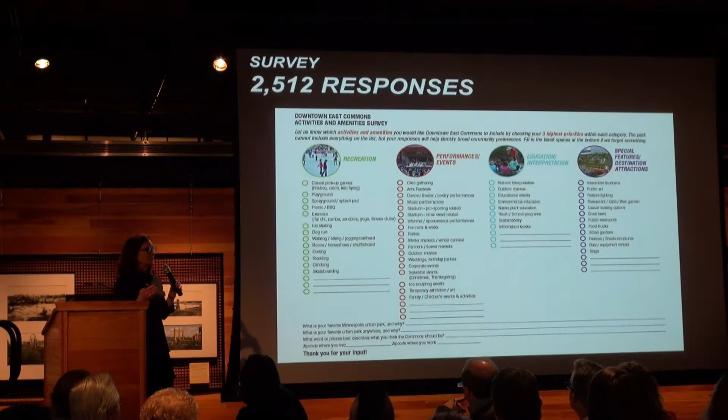So, public engagement - this is the Survey Monkey. You've all seen it. We asked you to give us your top 3 in each of these categories, from recreation to performance and events, to education and interpretation, to special features.

Not only are we pleased with the number of responses, it's pretty interesting to see where people live. Vast majority live within 5 miles of the Commons, or work within 5 miles of the Commons. That's pretty interesting. And these are the top 4.

We went ahead and charted the top 4 in each of those categories, because after the top 4, it drops off and they all become more equal. But it's sort of interesting to see the top 4.

So in recreation: walking, jogging, trails, picnic, barbecue, casual games, ice skating. That was sort of interesting.

In performances and events: music, farmers markets, flower markets, outdoor movies, art festivals. In education and interpretation: outdoor classes, sustainability, and environmental education, and then historic interpretation. So that was pretty interesting to see.

And then special features: urban gardens, restaurant, cafe, beer garden, great lawn, and public art. So what we like about these responses is that they're very civic-minded. They're very big ideas.

We also asked you to tell us about your favorite urban park in Minneapolis. And the interesting thing is there's not really a true urban park on that list, and that's because there's really not one in Minneapolis. So we learned something from this list, and then your favorite urban park anywhere - certainly those are great examples.

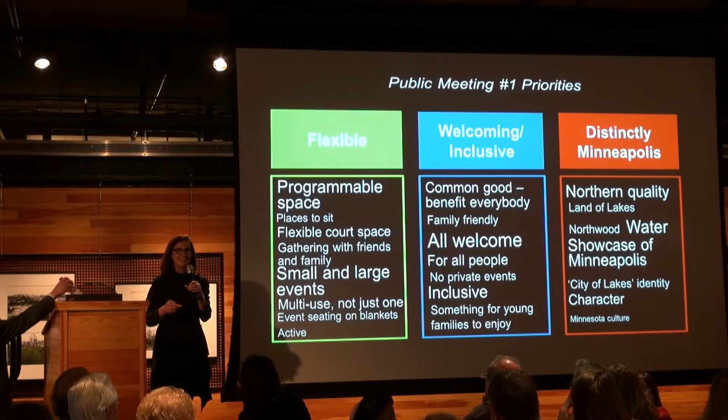So again, really great feedback. I seem to remember that sitting on blankets was 'anything you can do on a blanket' - that's what one table wanted.

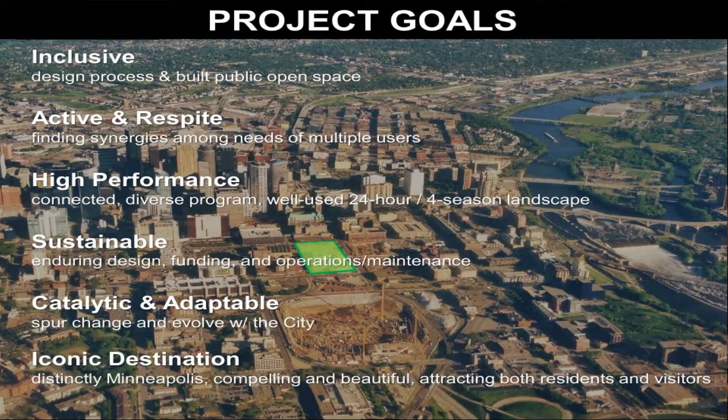So we want this to be inclusive, open to all, active and respite - Councilman Frey talked about that. High performance has to work well. Sustainability has all kinds of aspects to it, from social sustainability to environmental sustainability. It needs to be a catalyst for change and adaptable to change. And it, most of all, needs to be beautiful, an iconic destination, and it needs to be of this place.

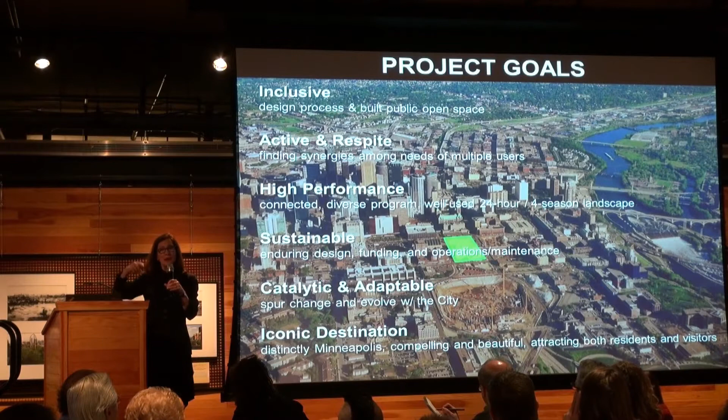So we'll talk about the alternative approaches. And again, Peter said it, but I want to say it again: we're not looking for a vote. Of course, if you like one, say so. But what we're mostly looking for is what you like about each of the four.

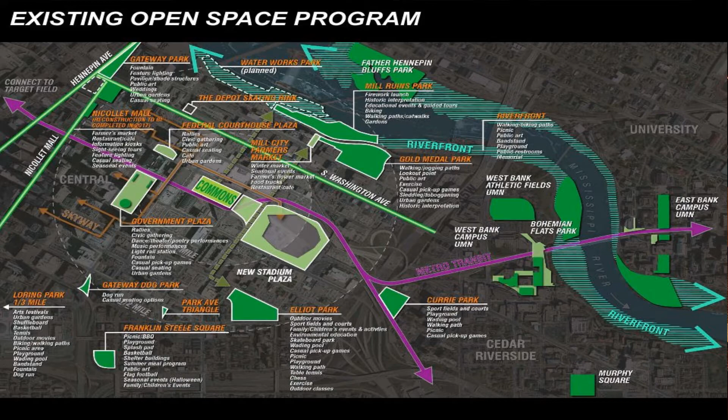Because we purposely chose alternative approaches in order to elicit response, we did it thinking about the context of the parks and public realm that surround us. Remembering that we have other features around us, we don't need to necessarily duplicate. We can't do everything on this 4.2 acres. Some things are being done other places, so how can we complement, how can we contrast, how can we add to?

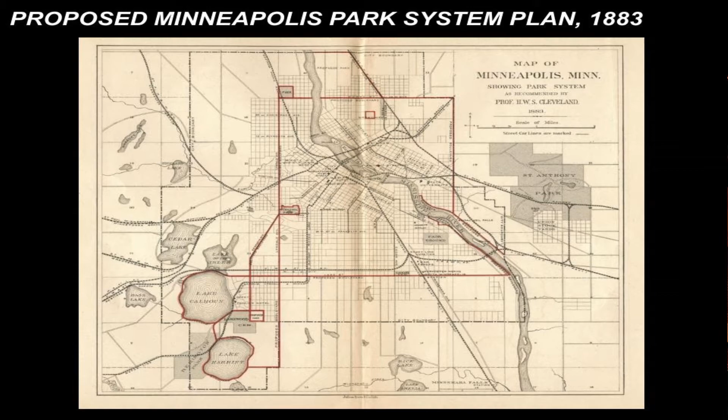We look to history on this site. There's a great amount of history on this site, but there's also a great history of park planning in Minneapolis. So we look at the proposed plan from 1883 by Cleveland, and it's pretty amazing to think about ourselves within that context. We also think about the environmental conditions of the site and the fact of Minneapolis.

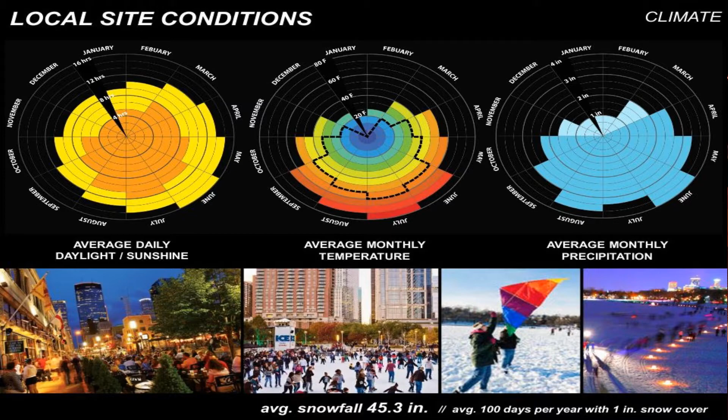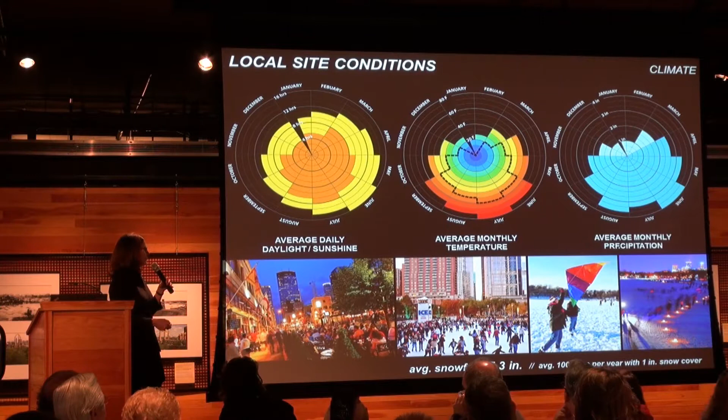Now this is one of the things I always find interesting. You have a lot of sun. I lived in San Francisco in my lifetime, and San Francisco doesn't have as much sun as you have. But alternatively, you have some pretty cold temperatures and warm temperatures as well. You have a fairly typical precipitation model, but you also have snow. So these are things that cause us to think about what to do, how to do it throughout the year.

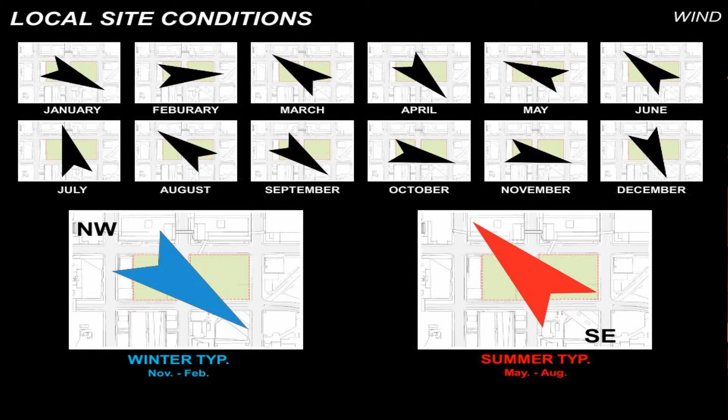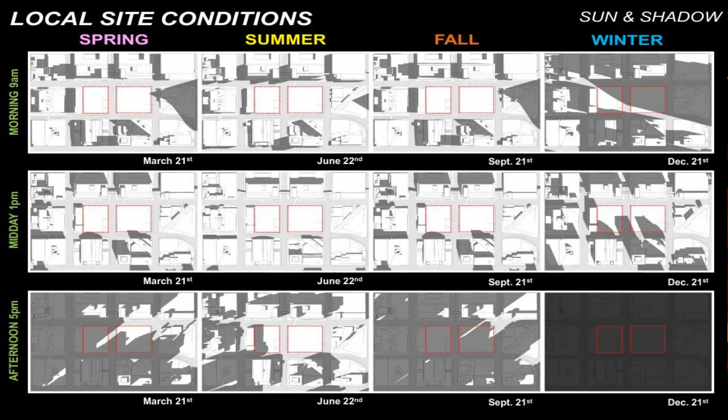You've got some pretty significant northwest winds that come across the site that we want to block to the best that we can, but you've got some nice southeast breezes that we might want to capture to the extent that we can. You've got a nice sunny site, partly because of the nature of the streets that surround it and the nature of the buildings to the south, which tend to be lower. The Armory will be there and it's lower, and then the County Services Building has a low portion. So the site gets a lot of sun, good sun, which is great.

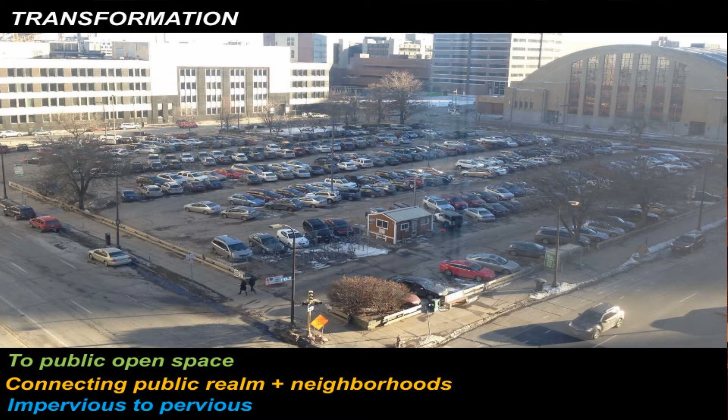Now we think about sustainability, and we think about the way one measures environmental sustainability and environmental change. We think about what the site is now - it's mostly impervious. We will be transforming that to mostly pervious. We will be making connections, and we will be making public realm and open space.

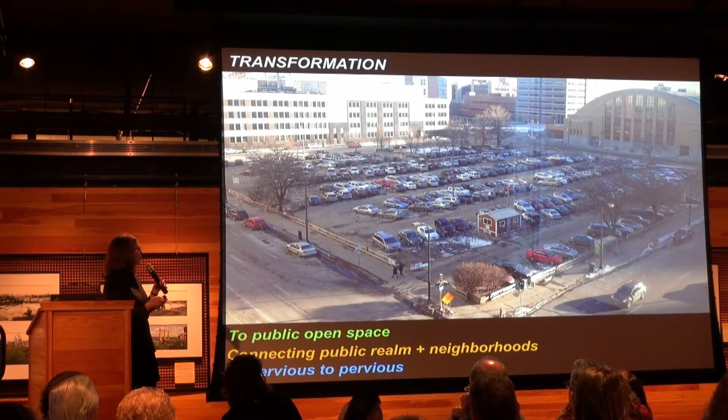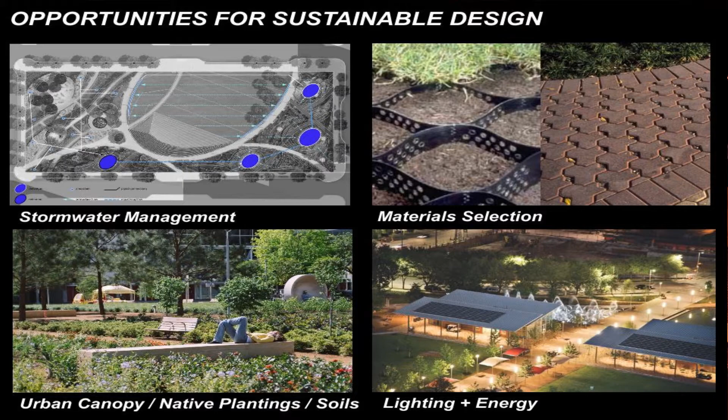We can treat stormwater like we did in this park that we did in Portland. We can choose materials that are permeable and robust. We can use plantings that are native, and these are solar panels on a cafe in a park in Houston. We can use energy.

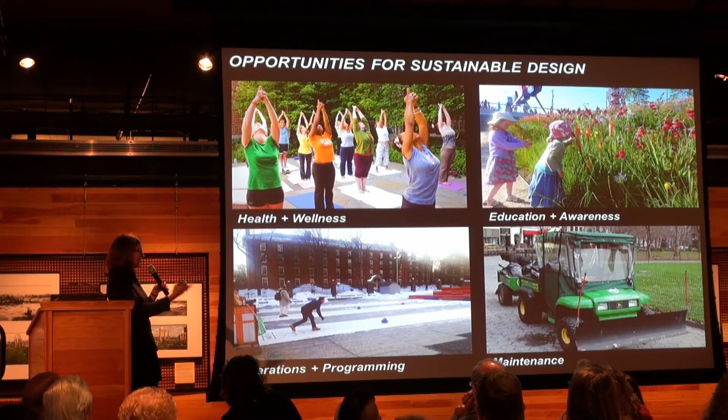We want it to be about health and wellness, education and awareness, operations and programming, and maintenance. We need to consider all of those things.

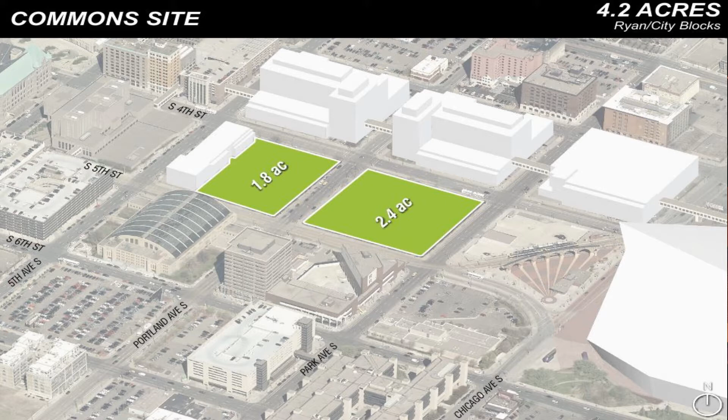So these are our 4.2 acres that we control - the western block, about 1.8 acres, the eastern block, about 2.4 acres. But as we talked about last time, this is what is perceived to be the public realm. And this is really the public realm that we need to consider.

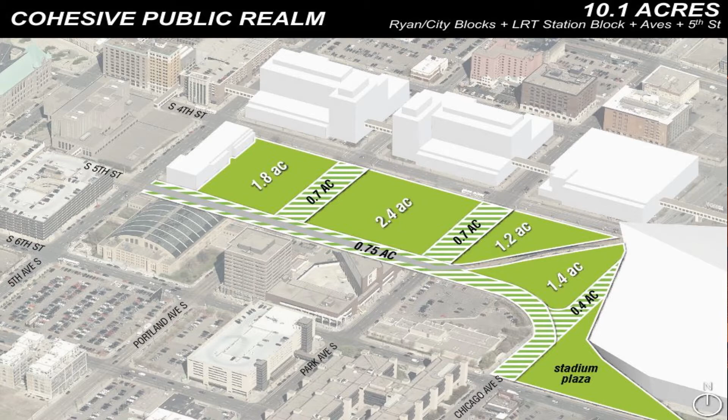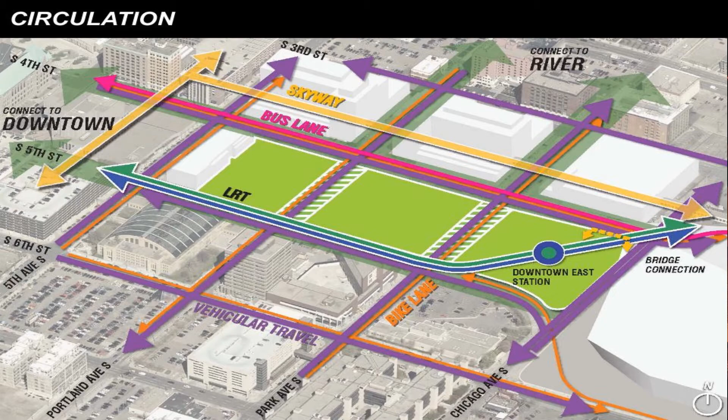So we consider the streets, and we consider the connection to the stadium and beyond in terms of connections. We think about the importance of the street grid and the connections along that grid, and how honoring the urban grid helps make an active urban place if you do it right. We have the LRT, we have bus lanes, and we have the Skyway. So we have many forms - bike lanes and many forms of connections that we want to tap into.

To that end, we want to talk about the streets a little bit. This is existing Portland, existing Fourth, and existing Fifth, and there are ways they will change for the better. Portland will get significantly narrower, with only 2 lanes of traffic and a generous bike lane. On 5th Street, this drive lane directly adjacent to the park will become a generous bike lane and not a drive lane at all.

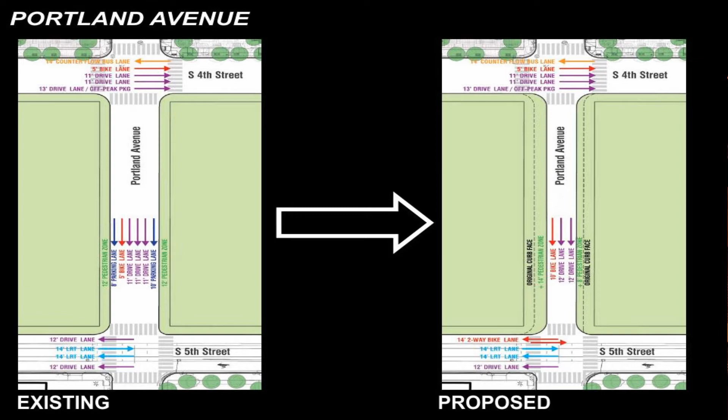We just learned that on 4th Street, not only will we have parking on the park side, there will be parking on the north side as well, and not a counterflow bus lane. These are all really good news for the Commons, helping us make this a pedestrian-dominated place and not a car-dominated place.

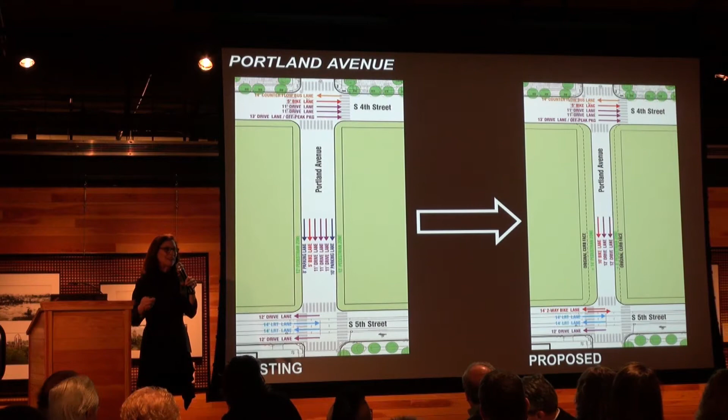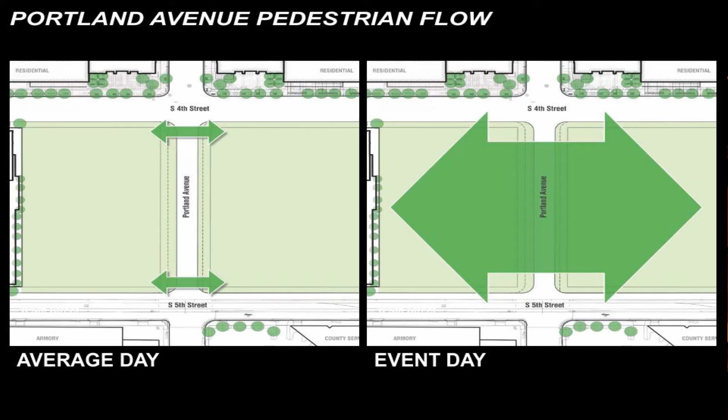Now, there are ways we can treat Portland Avenue. On a day-to-day basis, we want it to be very clear and safe that you're crossing at the corners, because there will be two lanes of traffic southbound day-to-day. But during many times, Portland will be closed for community events or other kinds of events, and we want people to feel that the park connects across Portland. There are various ways of doing that.

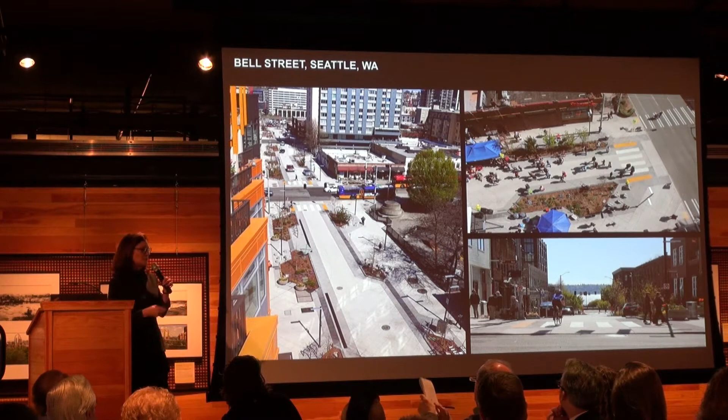This is an example of a street in Seattle where there are no curbs, and the design of the plaza extends straight across the street. Sometimes there are cars on that street, sometimes not, and it's closed to cars for festival-type use. In this case, the cars are regulated by planters, bollards, or other things.

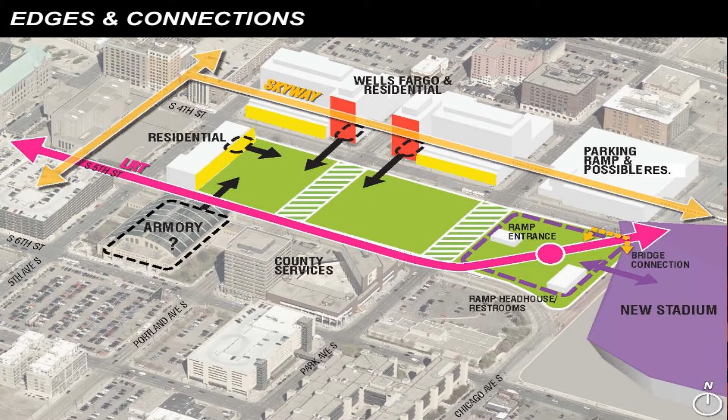We don't know for sure the future of the Armory, but we can hope it will be a synergistic set of uses with the park. There's county services, the stadium, and future development there. Then there's the LRT—no cars on 5th between Park and Chicago, but there will be the LRT. So we think about those edges and what that means for what we want to put in the park.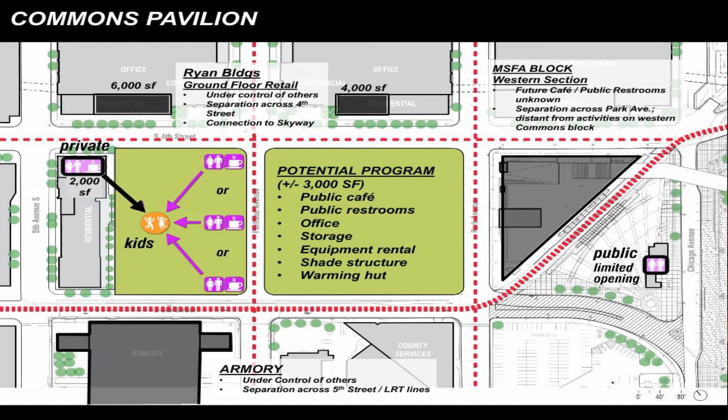We want great parks like this, good urban commons spaces, to have some amount of destination food and beverage, public bathrooms, and support facilities within the park itself. It's important that the park have a certain amount of oversight and amenity that is part of the public realm.

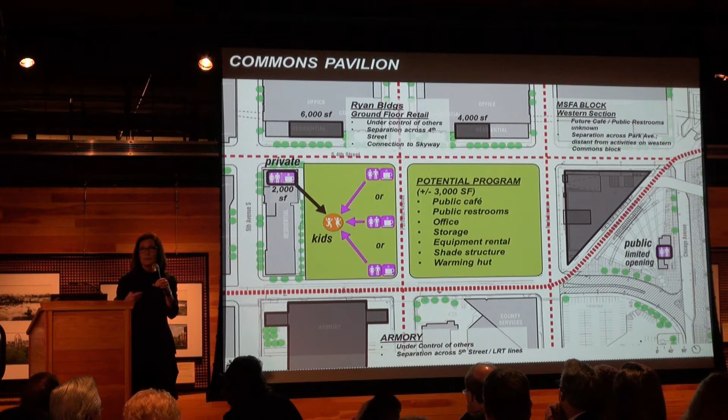There will be lots around us supporting the activity of the park, but within the private development, private realm venue. So we want to make sure we complement that in the park. Think about where—you'll see alternatives for where such a facility might go.

I love this diagram because it really speaks to what we are constantly striving toward, which is connections to the river, downtown east, and this growing neighborhood. Every time I come, it's more full of life. There are connections to the government district of downtown and to downtown itself.

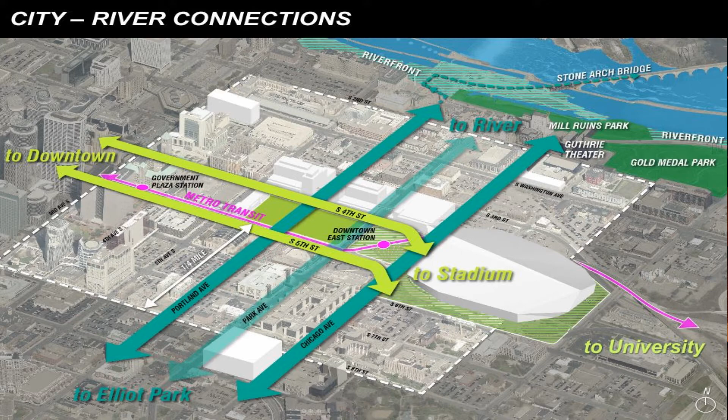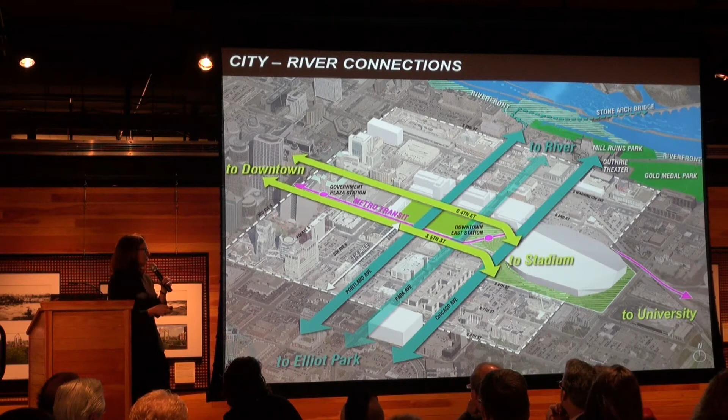Connections to Elliot Park and the neighborhood that has existed for years and years, and then connections not only to the stadium, but east to the university. So again, these streetscape corridors, as they come to the park and become part of the public realm, are very important. So here are the four approaches.

At this point, we're thinking about different frameworks of ideas, different approaches we could investigate, and where they might take us. What might they lead to, and how do we feel about them? We want to do that investigation with you.

We thought about the first approach being all about contrast, meaning the Western Block and the Eastern Block being very, very different. Then we thought about connecting and contrasting—making them different, but making physical and programmatic connections that link them. Then we thought about a connection that is more a gradient, transitioning from something at one end to something at the other end.

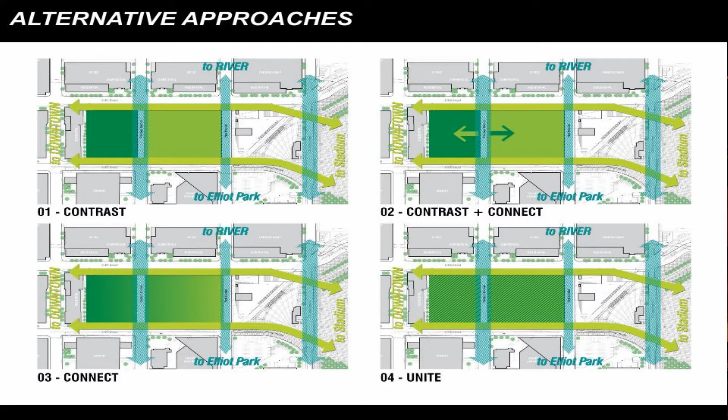You may remember last time we talked about a more passive end and a more active end, with a gradient between them. Or fourthly, we thought about what if we pretend the street's not there at all and just completely unite the two blocks?

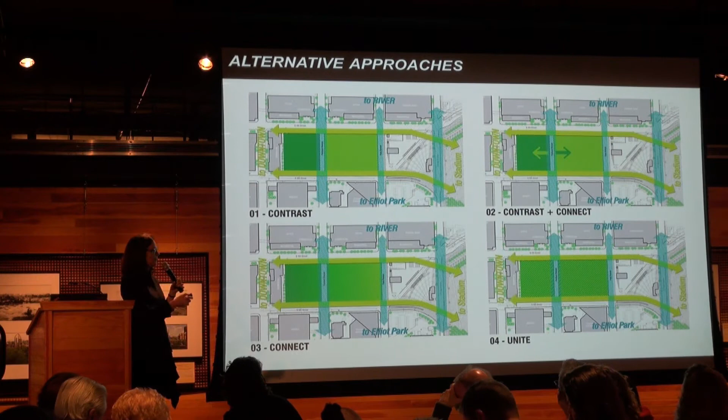And think about that as a different way of looking at it. So for each approach, you're going to see a cartoon diagram like this, and then you'll see a more illustrative plan. I'll start with the cartoon diagram and give you a bit of a legend, tell you what this all means.

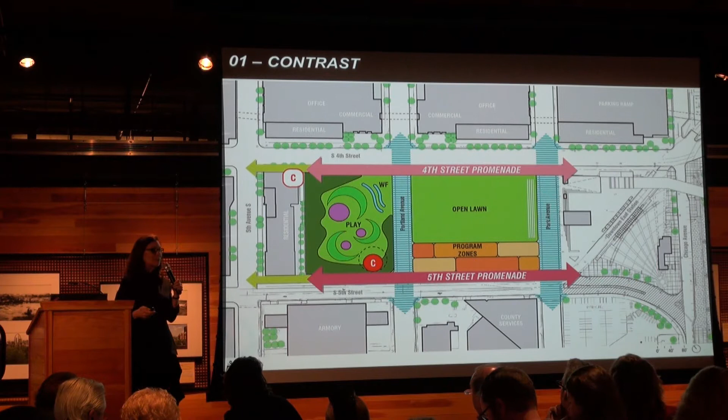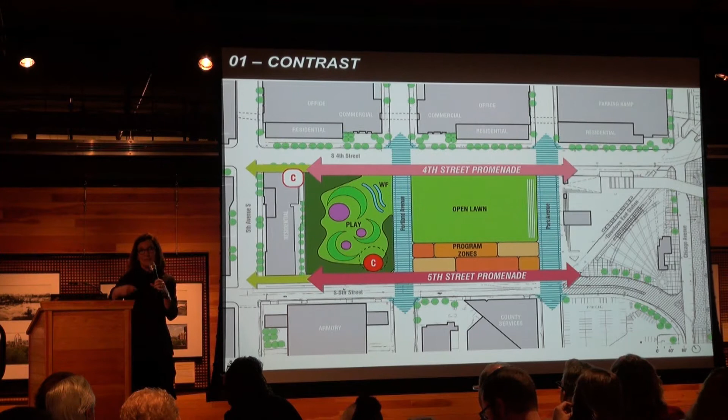And think of, in this case, the pavilion being on the high point of the site. When you're out there it feels flat, but in fact this side of the site is 8 to 9 feet higher than this side. It's big enough that you don't perceive it as a steep slope at all, but it works for us in some ways. By putting a cafe pavilion here, if we did a second level, it might actually give you some pretty good views.

So this is a plan that renders that, so you see it a little more illustratively. In this case, we're also thinking that the 5th Street promenade is not only where we would put the pavilion, but also where we might put the program garden zones, so you have a lot of program on 5th Street in this scenario.

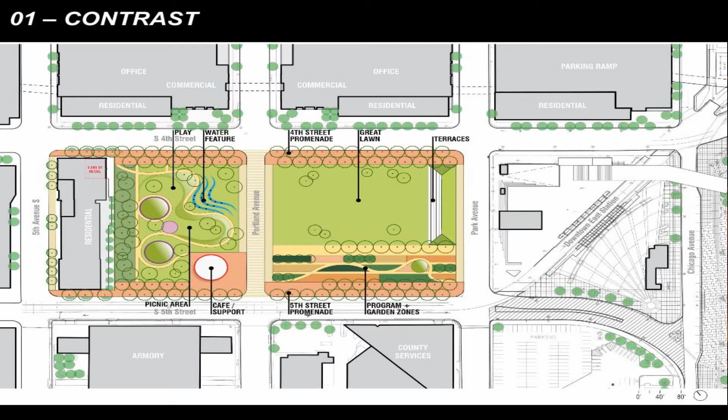We're thinking of this side of the park having a sort of serpentine landform—you see a couple of hills, a picnic area, and a water feature that weaves through those hills. This is very playful, very child-oriented, or kids-of-all-ages oriented. Then you see the Great Lawn and the program rooms set up in a rectilinear way that sets up perfectly for tents, our bocce courts, our ping pong tournaments, our curling tournaments, whatever it might be. These are not yet beautiful renderings.

We will be doing beautiful renderings before we're back in late May. What we've done for this time is show you 3D models, just to begin to give you a sense of the volumetric qualities of the various schemes and approaches, and the kind of spatial conditions of the various approaches.

This is looking toward the stadium. So what you see is the art piece that's part of the light rail station there. You can see a very, very different character between those two blocks. And then looking in the other direction from the stadium toward downtown.

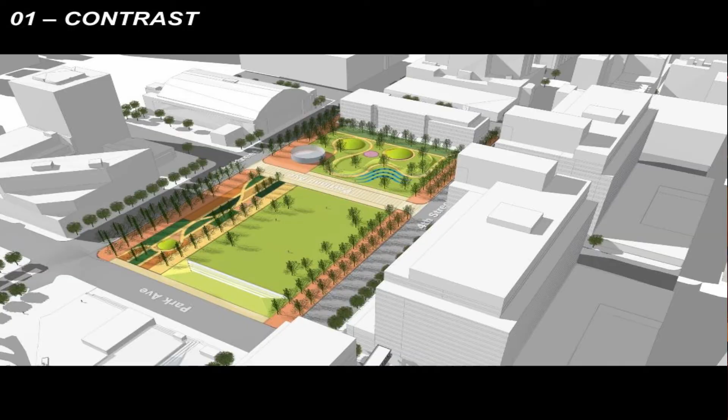Now, these are just images to evoke what I'm saying. They aren't exactly what I mean, because we're designing something specific for here, and we'll show you renderings next time that are specific, but this just gives you an idea.

When I talk about a water feature that's more of the landscape, this is a project in Japan, not ours, but it's cool to look at the idea of creating small hills with cooling mist in summer, or small jets of water, bubblers coming out from those hills. Or for the shoulder season, spring and fall, maybe a warm fog, so it's a place you'd want to come to in fall and spring. The Great Lawn and the kinds of things that can happen there.

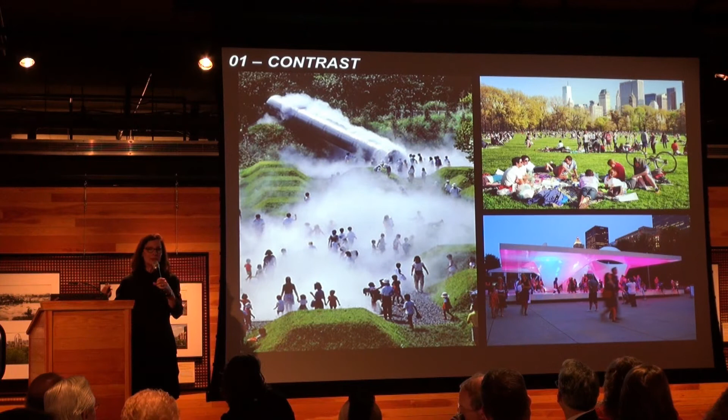And then the idea of a pavilion, in this case on a plaza. It's about shade, light, restrooms, and all kinds of possibilities. Food trucks could be along the 4th Street edge, with places to sit outside and eat or hang out. In the winter, maybe a temporary ice rink comes in.

And then in those outdoor program rooms, as I mentioned before, imagine setting up various kinds of events, like you see here in New York, this ping pong event.

We also like to test how one might set up a festival. So this is what we know of festivals, and what might be a good way of doing a festival on the site, testing it here. You start with a stage and a great lawn that in this case could easily hold 6,000 people, but you also want it to be a place for day-to-day play.

So it works for all the kinds of events and uses that might be imagined at this site, from outdoor movies to game day, a food and beverage event here, a big tent here. Small tents, 10 by 10, are very typical for art festivals, markets, and food festivals.

The promenade and the rhythm of the trees is set up perfectly for these 10 by 10 tents, or sometimes two together for 10 by 20 tents. In the outdoor program rooms, think cultural festival and tents, maybe a larger tent, since this would be flat so you can set up a larger tent.

Maybe around the children's play area and the pavilion you set up children's activities, an information kiosk, and maybe hide the porta-potties behind the berm along the park. There are many ways of setting up festivals and events on the site; we're testing and showing, for example purposes, one way one might do it.

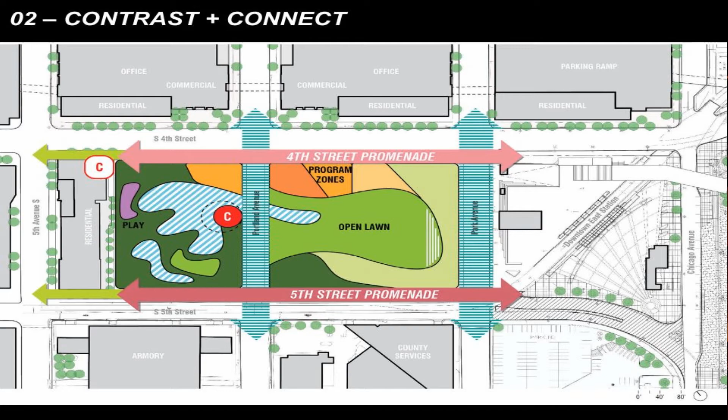Okay, now let's move to number two, contrast and connect. Still different characters between the two, different programming between the two, but they begin to connect. One of the major connection devices here is this fabulous shape, which evokes a lake but is actually a plaza with a little bit of water on it, so the cafe pavilion seems to be floating on this plaza of water.

On that plaza of water, in each of these lobes you could have bubblers or misters or small jets to entice children of all ages. So play and gardens in this area.

The program zones in this scenario are part of 4th Street, imagining more activity there, complementing the activity that happens when the developments come across the street, making this a real urban buzz of a street. And thinking of the 5th Street Promenade as more of a place of oasis, welcoming people from the neighborhood to the south and the offices to the south.

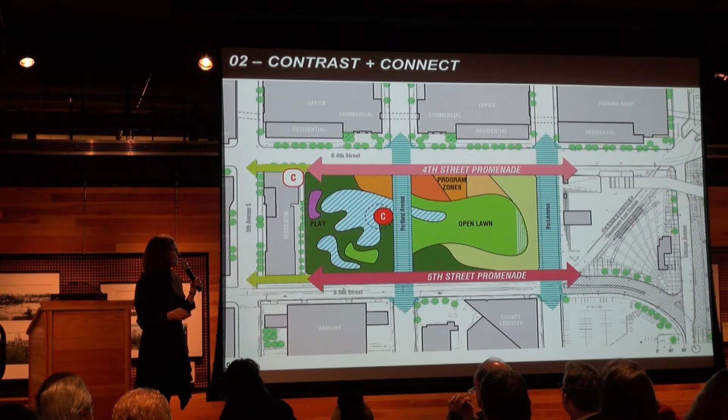The open lawn, the great lawn, performs the same way but perhaps with a slightly different expression. And the bleachers, or terraces, perform the same way but again with a slightly different expression. So you see a rendered plan of that.

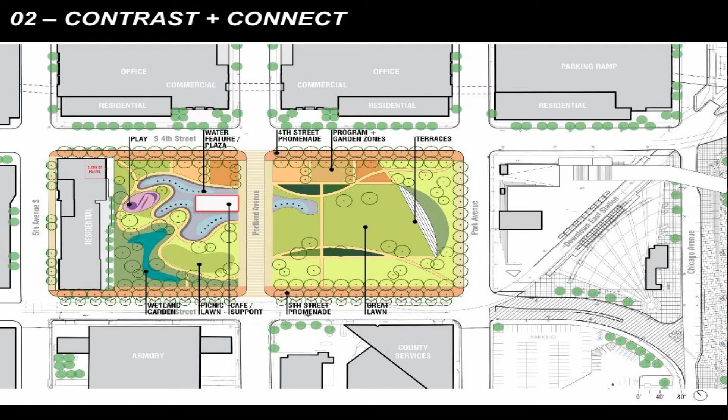And I think one of the things we like about this scheme is the way it jumps Portland and puts the cafe pavilion right on Portland, really embracing that as a connected device and not a separating device. The Great Lawn, again, working similarly but taking on a bit more character.

This could be wetland gardens, buffering the residential development, but connecting to the retail in the corner, the cafe at the corner, the play area, and the urban rooms along 5th Street, as I said.

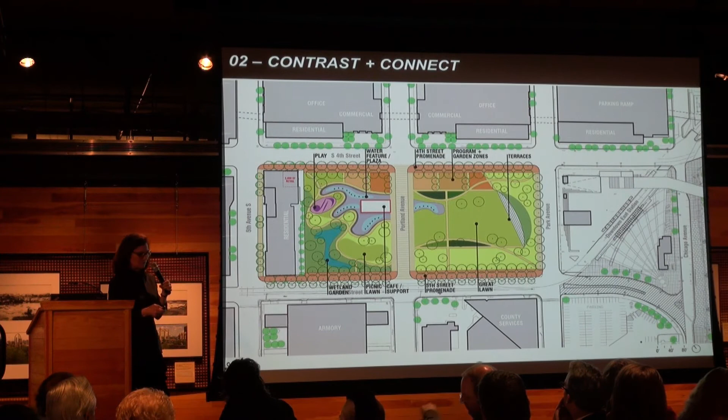So, looking toward the stadium. This is flat. One of the things about this plaza, this fountain plaza, is that when the fountain is turned off, when the water is turned off, it becomes a plaza for multiple uses. So it has a lot of flexibility.

And the idea of the pavilion seemingly floating on it. And then looking toward downtown. You can see how the berm here is sort of tilted in this case, looking not quite so dead west, which might be a good idea.

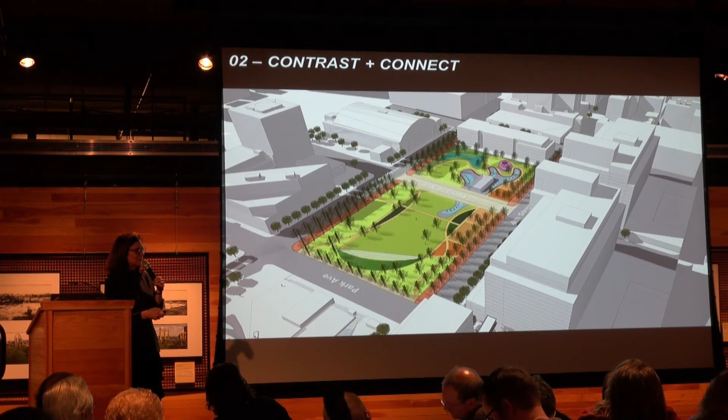So think about a great lawn in the summer, a great lawn in the winter. Think about sort of meadow grasses, maybe around the edges in some of these urban gardens. And think about the shoulder seasons when the grass isn't necessarily green, but you still have events happening.

And then we've done the same thing with this scheme, this approach, seeing how you might occupy it during festivals, community events, large and small. You can see that perhaps this one, more than the one you just saw, allows for festival use perhaps a little bit more freely because it's more flat and you've got this plaza that you can use.

Food, beverage, tent, some of the same ingredients, but maybe a little bit more of the family, children, and art stuff along 4th Street. And by the way, the food truck festival might be 4th Street, it might be 5th Street. Those are things that we're still trying to understand better.

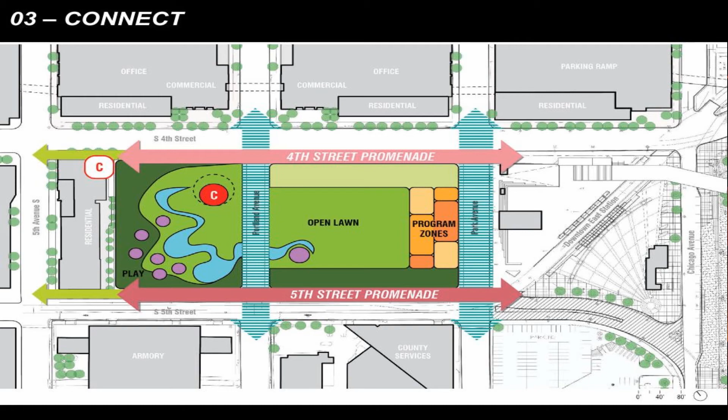Okay, so then we come to one that we call Connect. And we've done two different things with Connect. One is thinking of the Great Lawn just spilling right across, and thinking of the water feature just spilling right across. Not actually, but seemingly.

Now, the other thing we've done differently about this one is to think about the western block being perhaps more natural. And in this case, saying, what if this is a water body? So a water body year-round.

Could be frozen for ice skating in the winter, could be model boat ponds in the summer, could be learn to kayak in the summer. You could have environmental play along it that could be about exploration, learning about wetland vegetation, for instance. Kids looking at polywogs, that kind of thing.

And then in this case, the program zones being along Park Avenue. So a slightly different way of thinking about the festival setup and outdoor program zones sort of extending the space in this direction. And in this case, the pavilion being on the 4th Street Promenade, so more a part of the activity of the 4th Street Promenade.

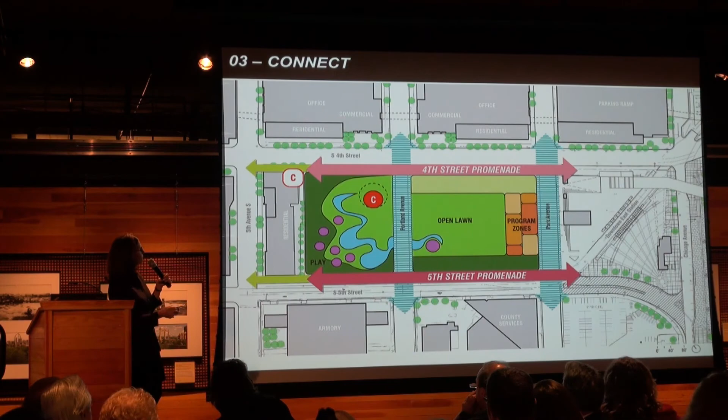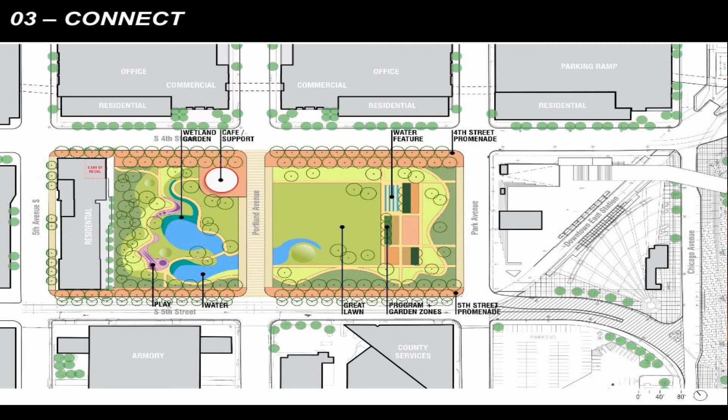And it could look something like this. Again, play, sort of trailing along, being part of a lake, a bridge over a lake, a cafe pavilion, a wetland garden at the downhill side of the lake, bridging across or jumping across.

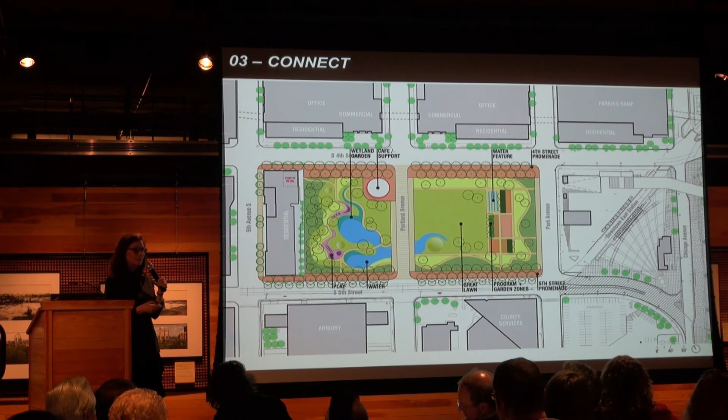The outdoor rooms here, we could have one of them as a plaza with a small water feature that's more like jets, so that you could play in water in this scenario as well. No terraces in this one, more of a flat condition across in this one.

And again, a 3D view, and not yet a design for a pavilion, a placeholder for a pavilion. Luckily, we have Vincent James Associates Architects on our team who can do a beautiful pavilion. And I should also mention our other local partner, Tom Whitlock from Damon Farber, who's here tonight, and many people from that office. We're so thrilled to have them as local partners.

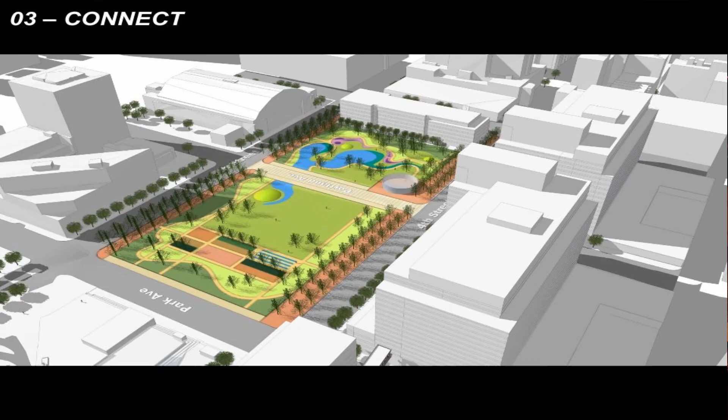And we have a much bigger local team as well. Sorry, I meant to mention that from the beginning, of experts helping us, and we're very pleased to have them all working with us. So looking toward the stadium, looking toward downtown.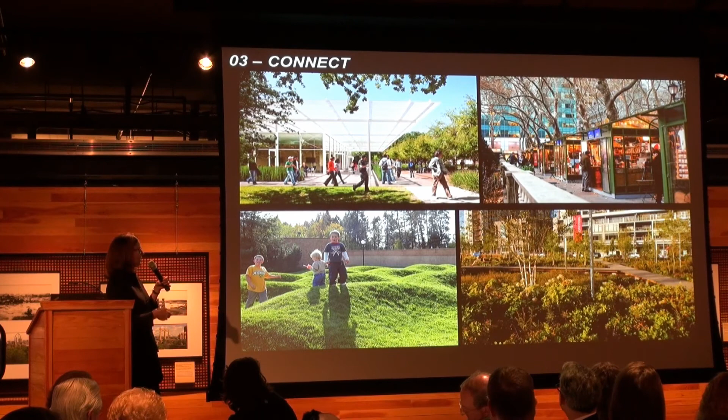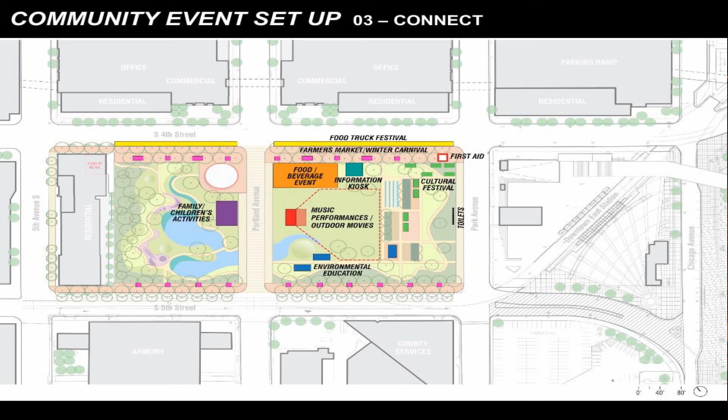The idea of wetland gardens, and boardwalks possibly through those wetland gardens. And then finally, play that's about exploration of the environment, not swing sets and slides. This one probably sets up the least in terms of the western block, and accommodates big events probably the least of the four, just by the nature of the water body, which would be there year-round. Still works great, but just a little bit differently.

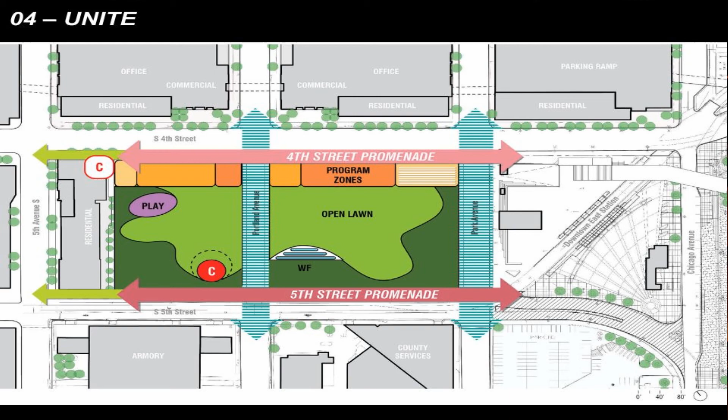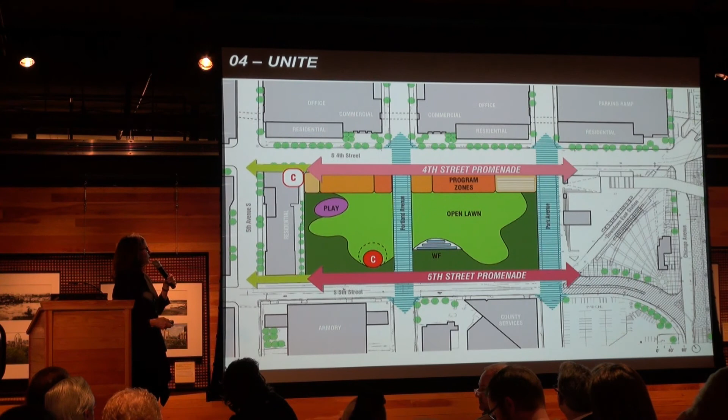So then we come to Unite, and we thought, what if we thought of this as one place uniting the two blocks, with one expression that's more centrally focused. Spanning Portland with the open lawn, making it more inwardly focused, with program zones all along 4th Street, a pavilion on the green, a play area on the green, and an interactive water feature on the green. So much more about a central green, which could look something like this.

So program rooms, program zones all along 4th Street, some terraces at this corner. It's sort of a turned corner.

One thing I should have mentioned on every one of these that I will mention now: this is the bridge that is being planned that will go over Chicago and over the light rail tracks and connect to this block. That connection will then extend right down the promenade on 4th Street. So we see that as a very important connection. This will also be a very important connection of people crossing Park at the street.

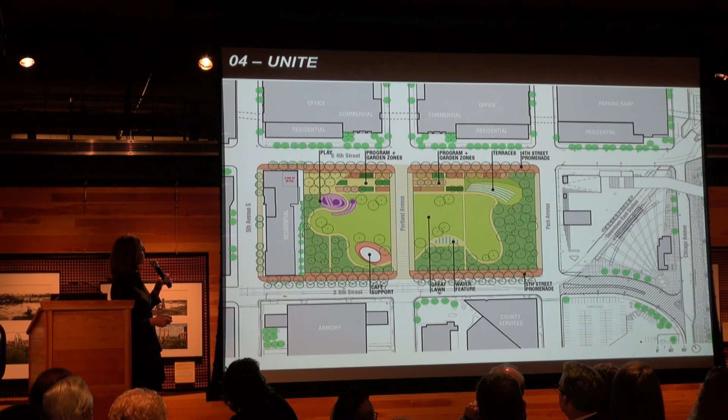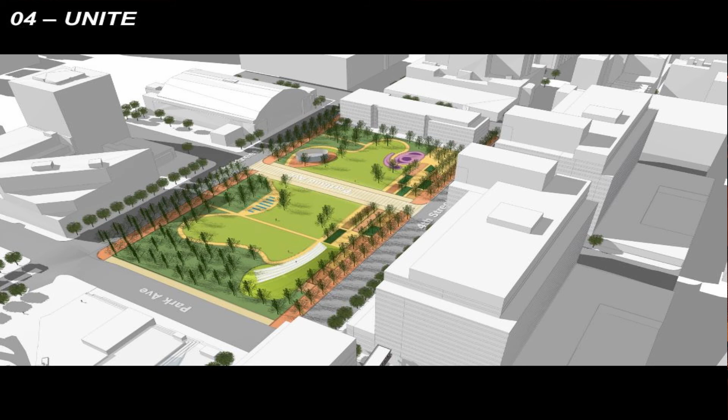And so you see that one rendered, beginning to be rendered, 3D modeled at least, looking toward the stadium and looking toward downtown. So you see a very different kind of character, very much more inward focus.

You must remember the idea of using the Great Lawn at night. We want this to be an active and attractive place at night. The idea of urban gardens and what they could be, and there's actually lots of programming embedded in those gardens. There's a big lawn for putting up a tent, there's a place to put up a market under trees, there's lots going on there.

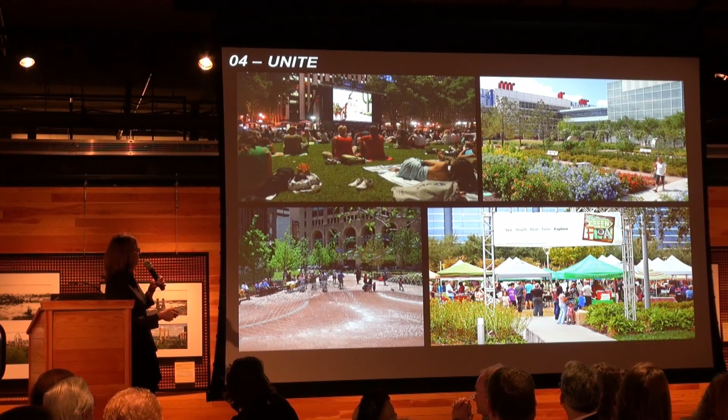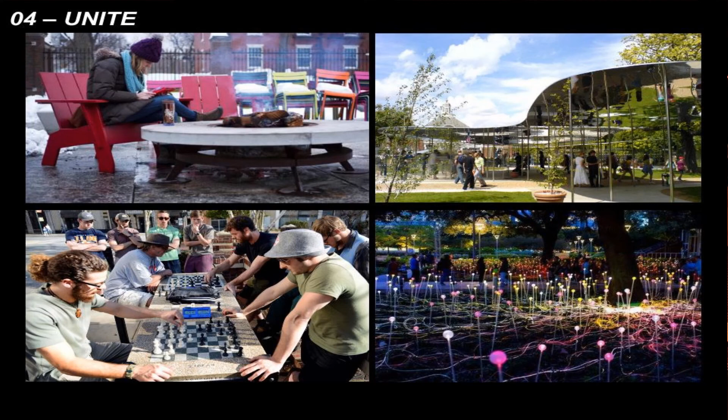The idea of a fountain that when turned off is a plaza, and then a place to set up temporary events, a place to be when it's cold, a shade device on the green, festival lighting or seasonal lighting, and then everyday uses in the program zones.

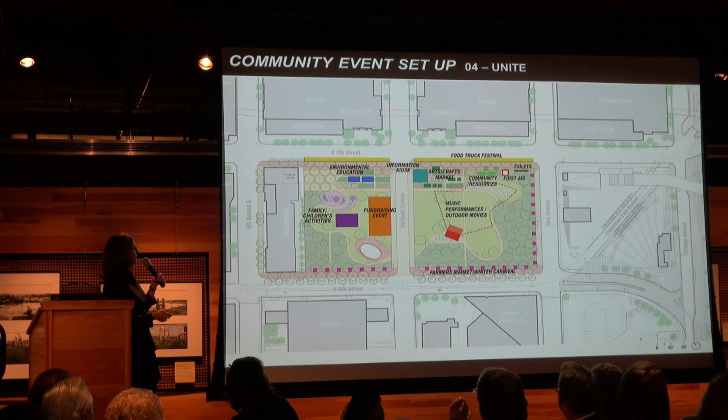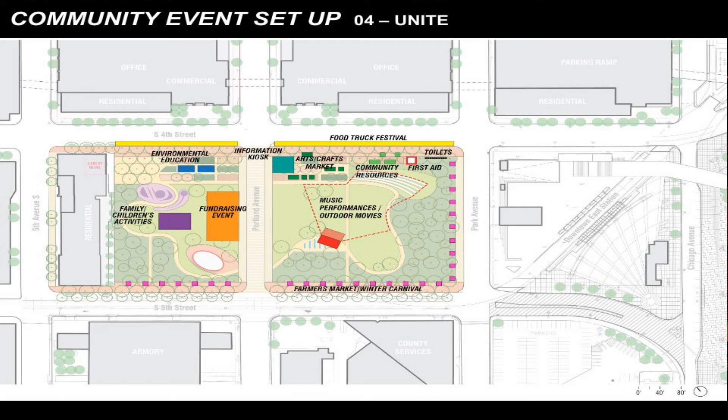And in this case, you see a big tent could go on this western block, and then you can still have music and performances and outdoor movies on the eastern block, with lots of activities along 4th and some also along 5th.